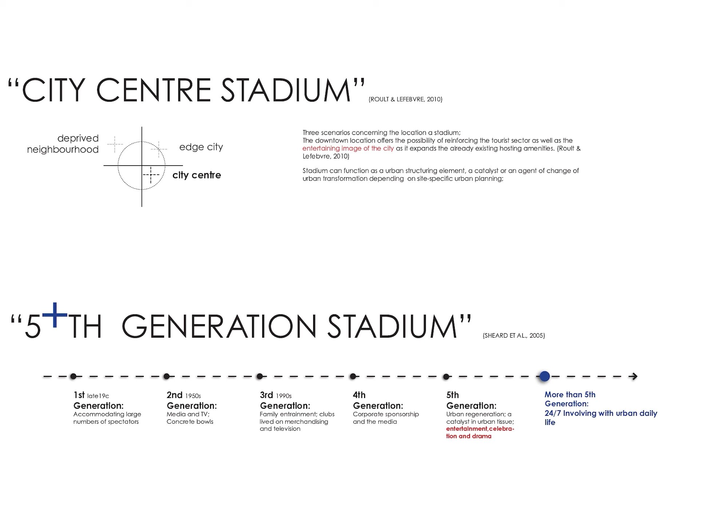Through the preliminary research on Olympic legacy use strategy and several cases of Olympic stadiums, we find that whether such a mega project functions well depends not only on the stadium itself, but on the social context it sits in and whether it could respond to the actual needs of this region and society properly.

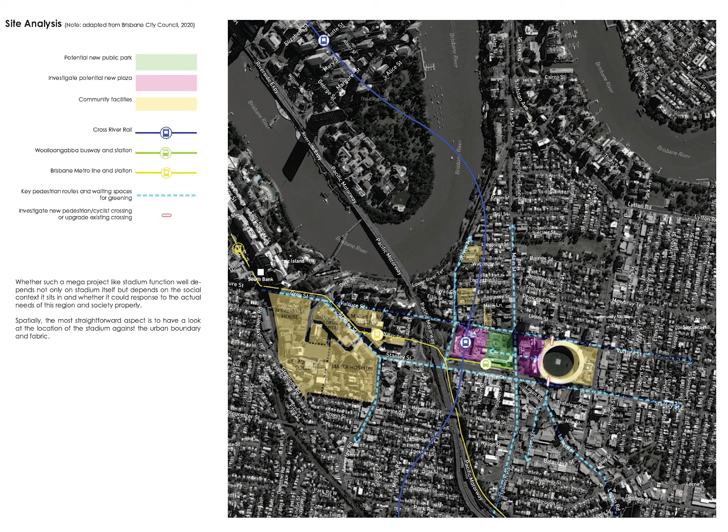Sitting in the residential community, benefiting from the nearby transportation network, we can say that Gabba Stadium is a downtown stadium. The stadium reinforces the entertainment images of the city. It is a place for celebration, drama, entertainment beyond only competitions. But here is our question: could it do more? Could it function 24/7 and involve with the urban daily life?

If we look at the detailed analysis of this precinct, we can find more people will live here, more dwellings will be erected, more visitors will come. And the government is expecting a good place to live, a better communal space. This site situation decides celebrating and living should somehow interact and interweave together.

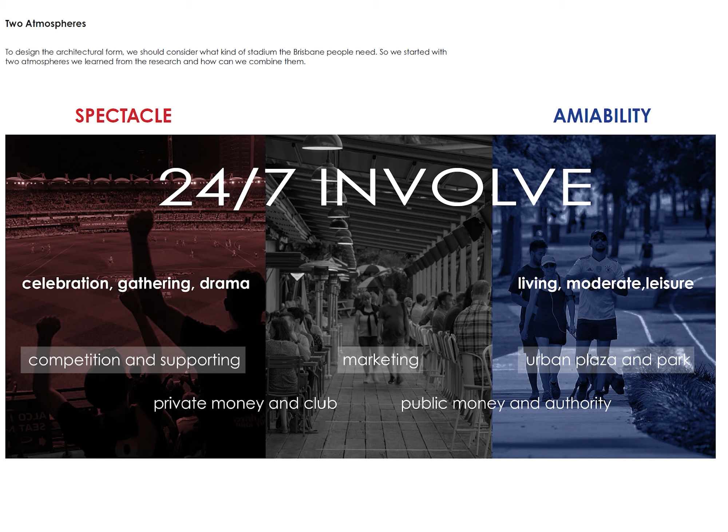So we started with two atmospheres we learned from the research and how we can combine them. Architecturally, these two atmospheres require two different qualities to the place. One is spectacle and another one is amiability. To achieve spectacle, we separate the roof, which will look light and white, like a cloud floating above the stadium. Two pylons will lift the roof, and the high and dramatic pylons will be a sign of the stadium and

a landmark of Brisbane. To achieve amiability, the large accessible roof will be an urban plaza for the public to hang out and exercise. And the platforms and huge gap of the stand will disintegrate the massing of the stadium to make it more inviting.

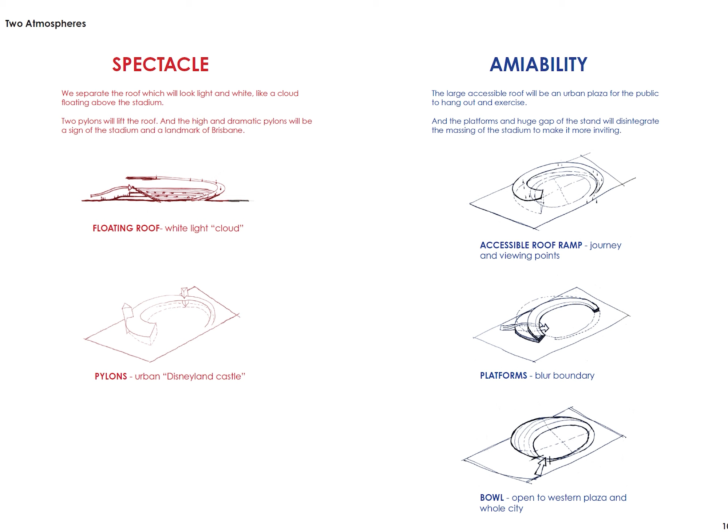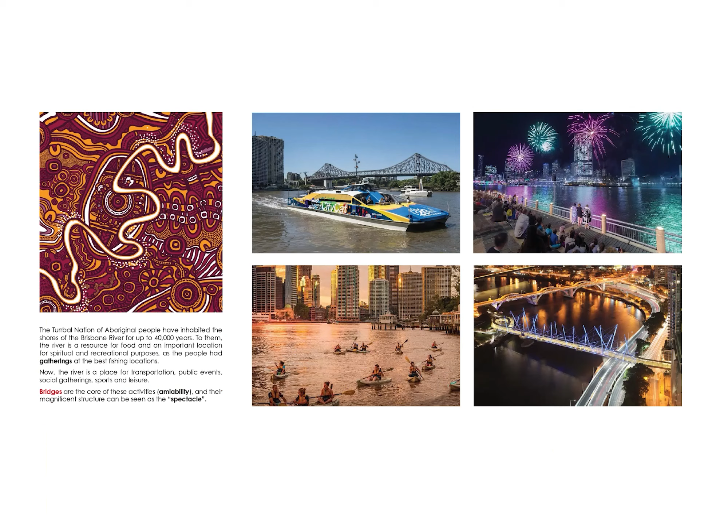Despite the stadium directly influencing its adjacent community, the Olympic Games can also be a collective legacy for the whole city. Thus, we tried to search for an inspiration that can be the icon of Brisbane in a broader urban scale. The Brisbane River is instantly prominent. The Turrbal nation of Aboriginal people have inhabited the shores of the Brisbane River for up to 40,000 years. To them, the river is a resource for food and an important location for spiritual and recreational purposes, as the people had gatherings at the best fishing locations.

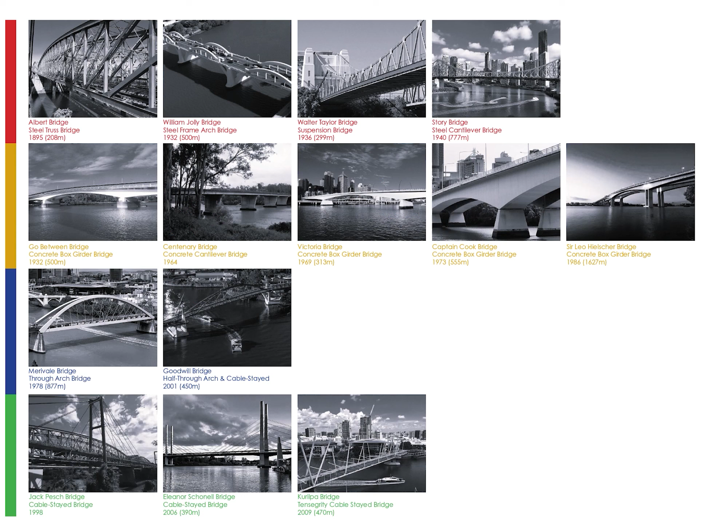Now, the river is a place for transportation, public events, social gatherings, sports and leisure. Thus, bridges are the core of these activities, which is amiability, and their magnificent structure can be seen as the spectacle. Taking bridges as our form inspiration, a research of bridge typologies in Brisbane is conducted to determine the suitable design for our stadium. Cable-stayed and suspension bridges are the current mainstream typologies. These systems are also used in the proposed Green Bridges project.

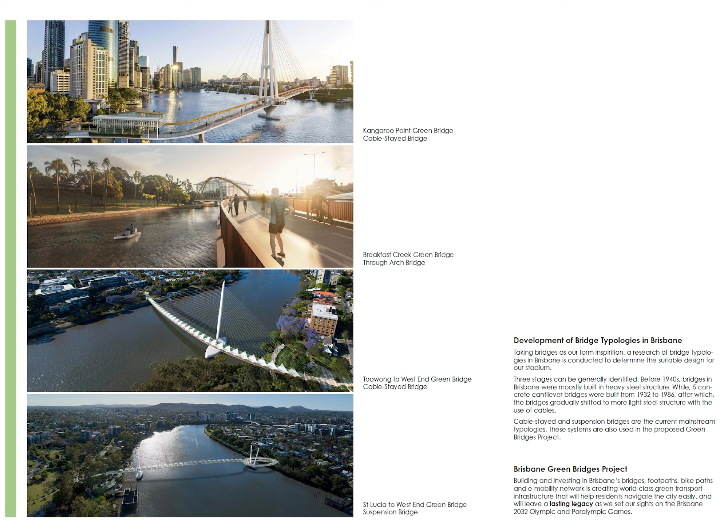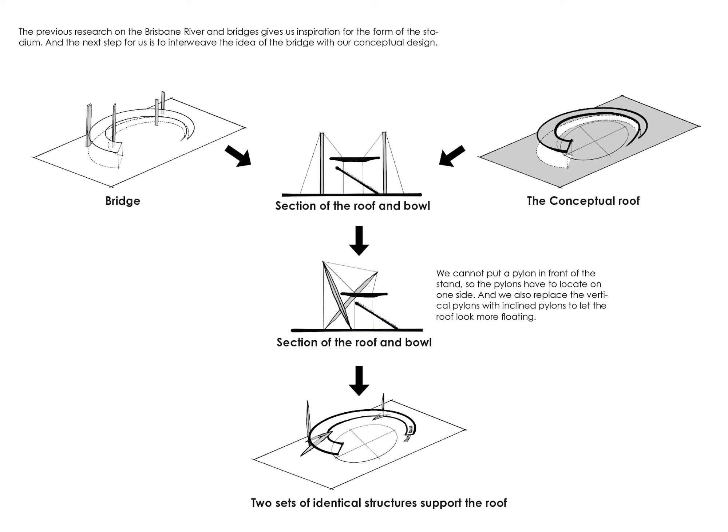The previous research on the Brisbane River gives us inspiration for the form of the stadium. And the next step for us is to interweave the idea of the bridge with our conceptual design. So we combine the form of the bridge and our floating roof to create a typical section of the stadium. But we cannot put a pylon in front of the stand, so the pylons have to locate on one side. And we also replace the vertical pylons with inclined pylons to let the roof look more floating. Thus, two sets of identical pylons support the roof.

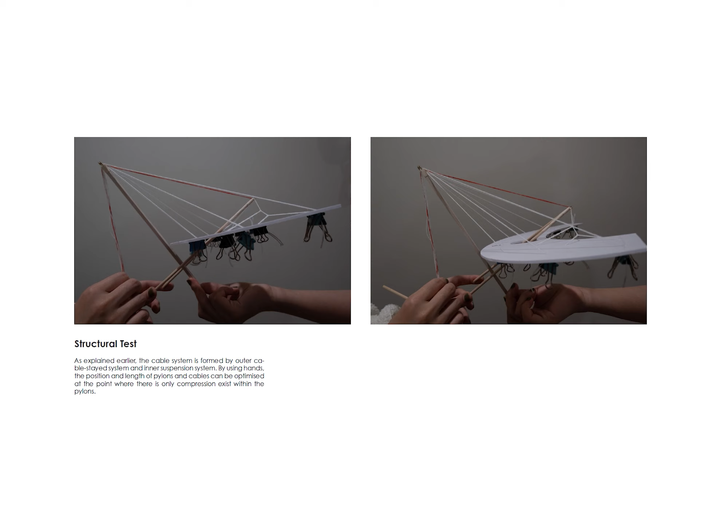After a series of structural experiments with physical models, we have developed a primary structure solution consisting of 3 pylons and 2 types of cable systems. The final design of our cable system is divided into 2 typologies. Cable stay system is used at the taller outer side, while the inner side uses suspension structure, which has a softer visual perception.

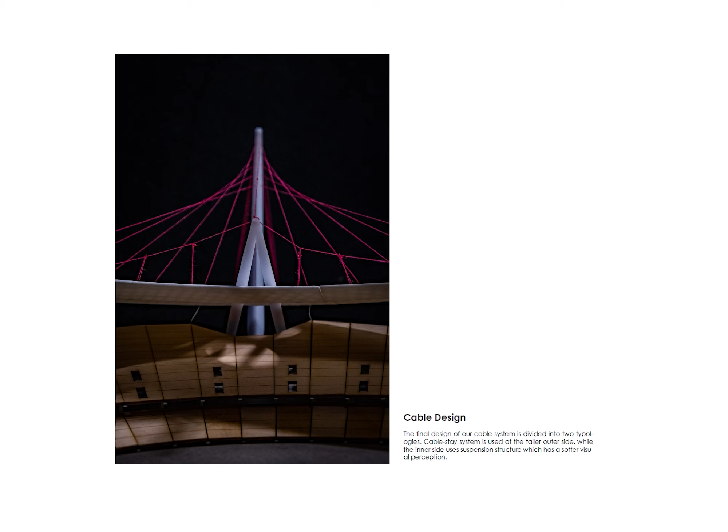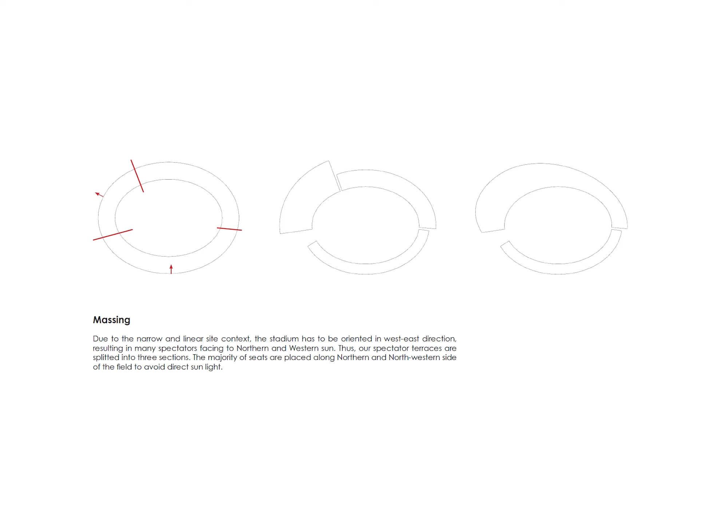Due to the narrow and linear site context, the stadium has to be oriented in west-east direction, resulting in many spectators facing the northern and western sun. Thus, our spectator terraces are split into 3 sections. The majority of seats are placed along the northern and northwestern side of the field to avoid direct sunlight. The main entrance is on level 2 at the west of the stadium, facing the park and the train station, with platforms inviting people from 3 directions.

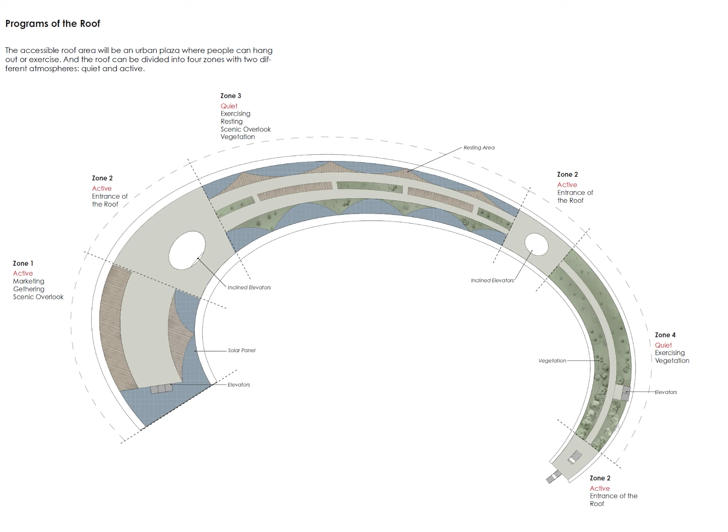The accessible roof area will be an urban plaza where people can hang out or exercise. And the roof can be divided into 4 zones with 2 different atmospheres, quiet and active. Zone 2 is the entrance of the roof with elevators and a stair. Zone 1 is an active space that is the largest part of the roof. This area is a place for people to gather or hold small markets. Because this zone is at the west of the stadium, it has a great view of the CBD, especially during sunset.

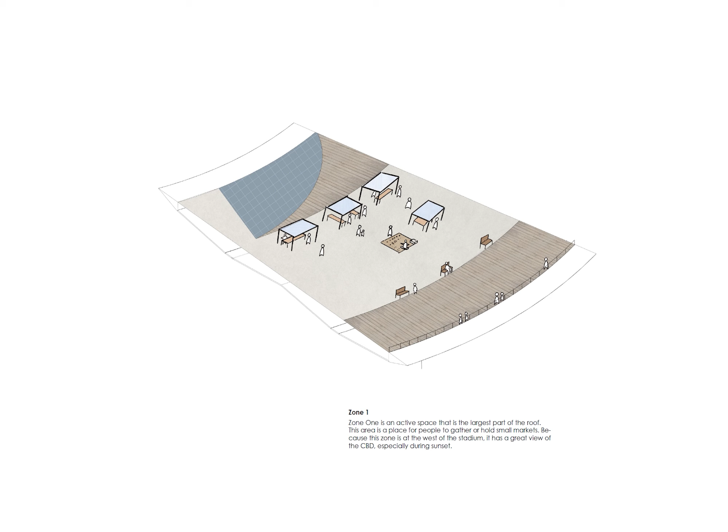Zone 3 is a quieter space with sunshades above. 2 runways, where people can exercise, run through this area. The green space on the inner side will avoid people from looking into the field directly, while people can enjoy beautiful views from the resting area on the outer side. Zone 4 is also supported by columns below. So this area is suitable for small trees and shrubs, while other zones can only have light and short species like grass. When people walk or run through the green space, they will have a sense of running through a forest.

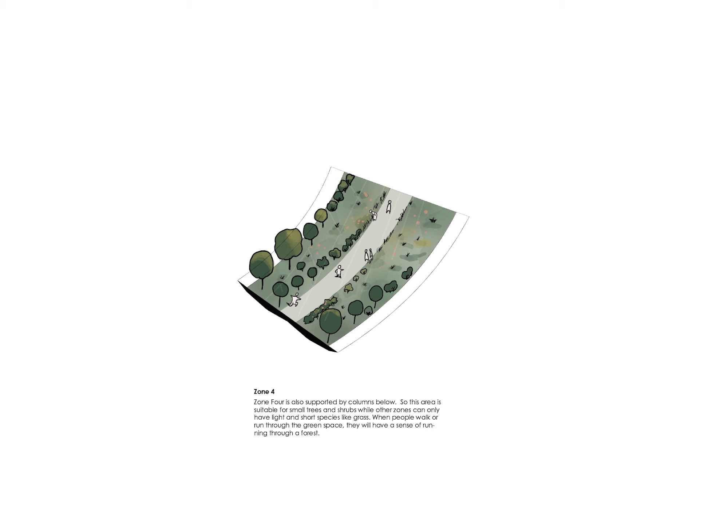Below the roof, we separate the programs into 3 types. The red area is for the players and staff. The yellow area is for the general service, and the white is for entertainment and marketing. Except at game times, the white and yellow areas will all be accessible to the public for better living and better leisure.

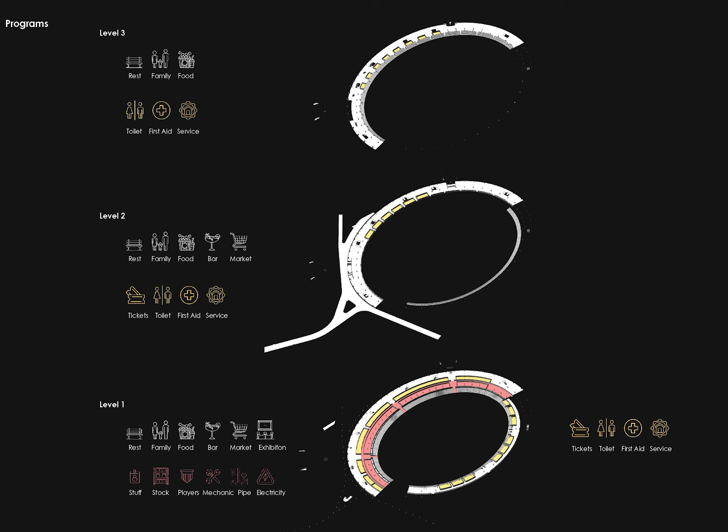Through a comparative analysis of 5 architectural projects of similar scale and typologies, we determined the most suitable pylon structure and construction method for this design. The shape of the pylon was also optimized according to its bending moment due to its self-weight. In addition, we designed the roof structure in detail to reduce its visual perception and appear to be floating while achieving structural feasibility.

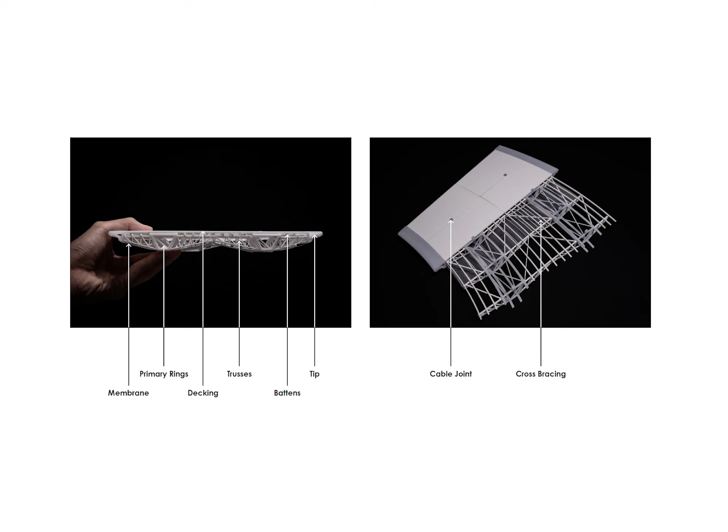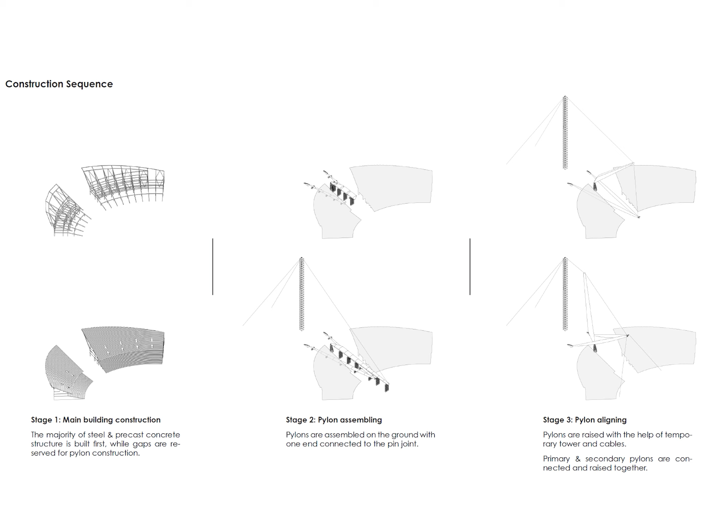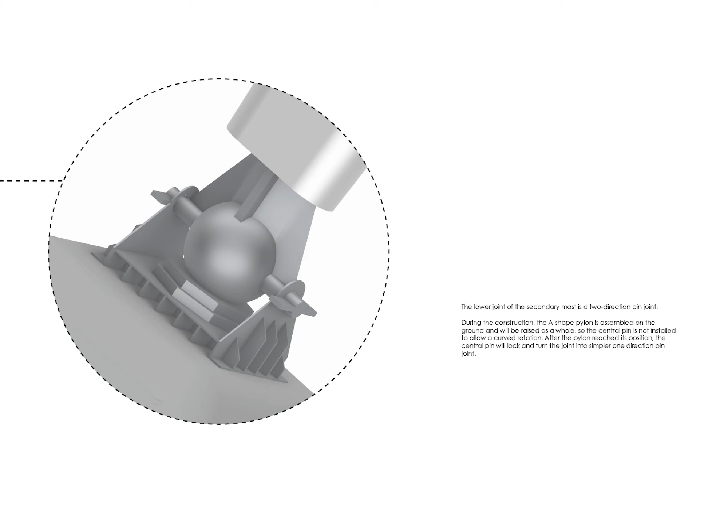As the construction site is located in a narrow urban area of Brisbane, we designed the most practical construction sequence, especially considering that the roof uses 2 cable systems with completely different construction logic. Additionally, all primary structural joints were carefully designed to not only consider the direction of rotation required for the construction and use of the pin joints, but also using a unique design to minimize the visual impact of the massive pylon on its surroundings.

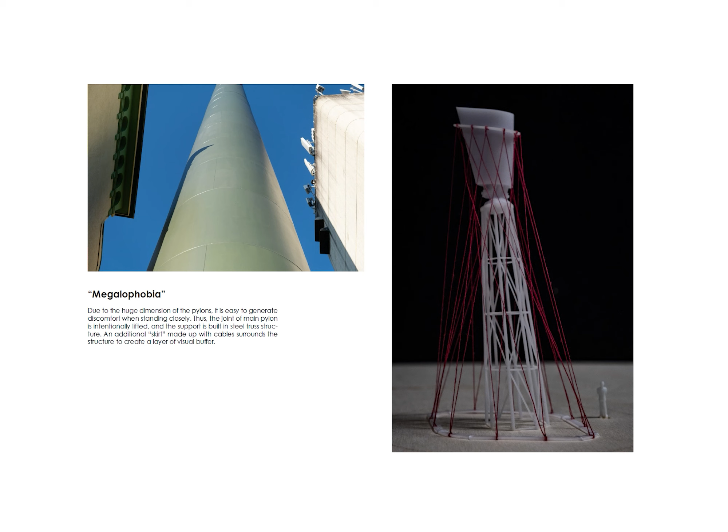Our design achieved 2 goals of the SDGs. The first one is Goal 3, good health and well-being. The second goal is Goal 9, industry, innovation and infrastructure.